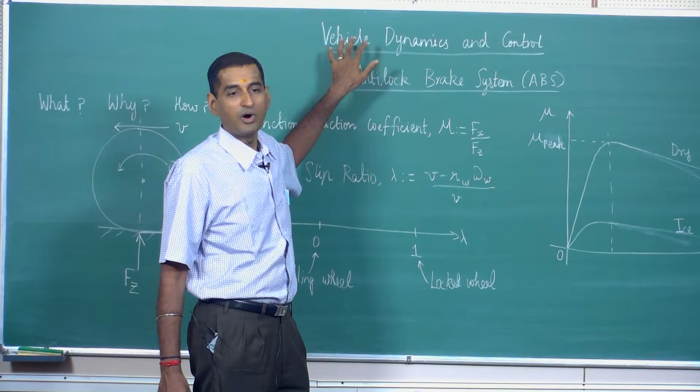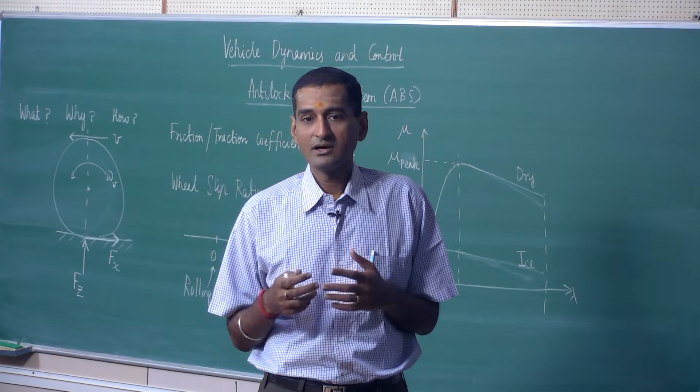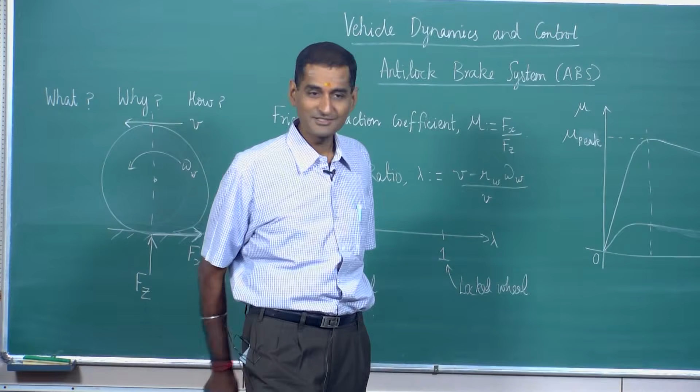As we transition to more complex and advanced automobiles, the domain of vehicle dynamics and control is going to become very important. So to motivate the importance of this domain to automotive design, today I am going to take a simple example of anti-lock brake systems, which all of us are aware of, and map how vehicle dynamics and control is applicable to this application. One could take other applications also and do a similar mapping, so that we get motivated to learn this field of vehicle dynamics and control.

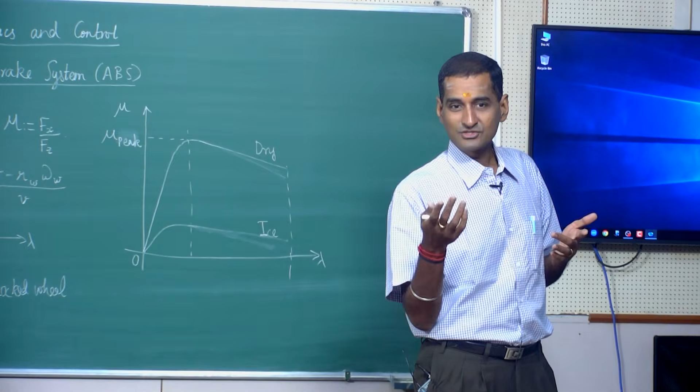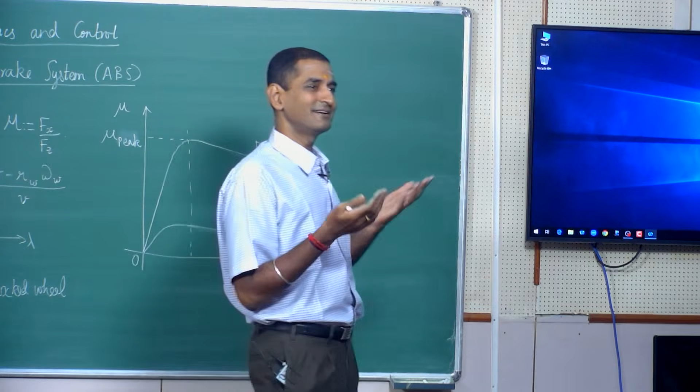I am sure all of us would have heard about ABS. If you travel in a car, it is very likely that the car has an ABS, and you would have seen ABS printed on the rear of the car to demonstrate that it is fitted with an anti-lock brake system. It is very common in automobiles today, mandated by law in certain classes of automobiles, and on the way to becoming mandated in other classes as well.

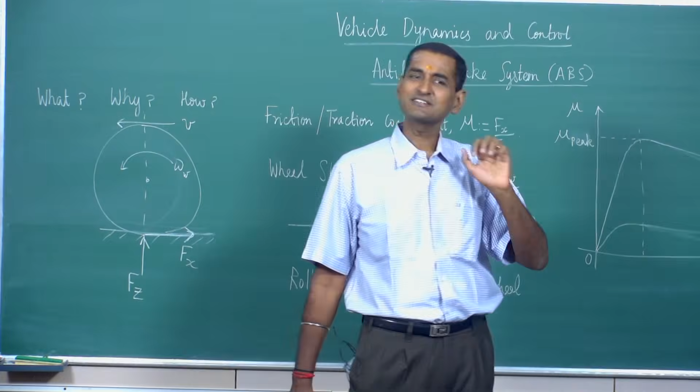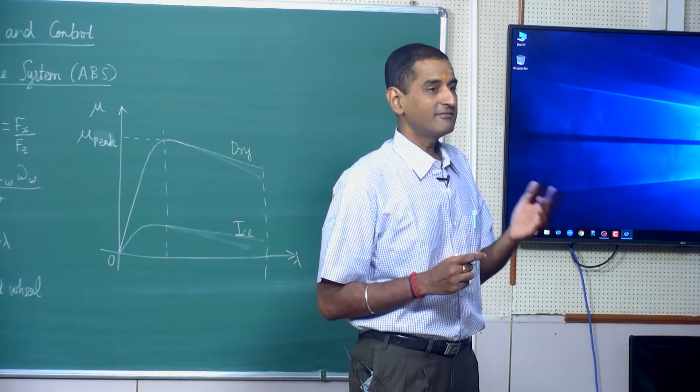If you look at the title, there are three words: anti-lock, brake, system. We understand what a system is, and we also understand what a brake is. For what purpose do we use a brake in a vehicle? Whenever we want to decelerate the vehicle, we apply the brake, and whenever we want to stop it, we continue applying it so that it comes to rest. That is the broad function of a brake system.

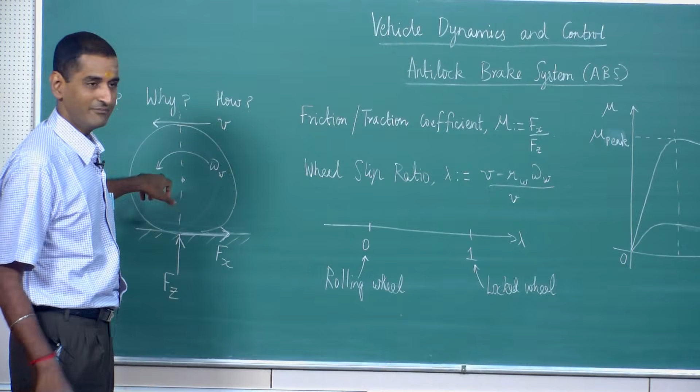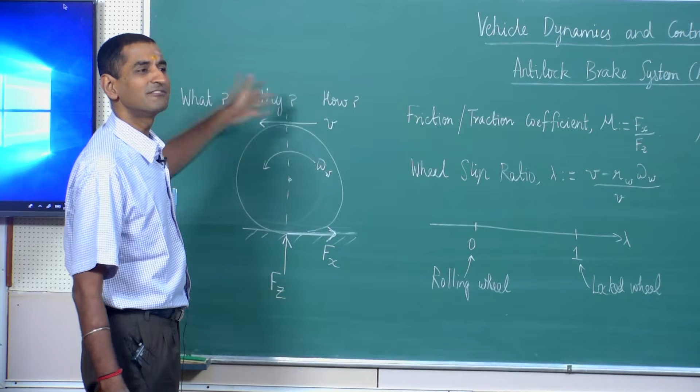Then what does this adjective anti-lock mean? Let us first understand that, then we will figure out how vehicle dynamics and control becomes important. Let us look at only one wheel, even though a typical passenger car has 4 wheels. If I draw a simple diagram, without loss of generality, the wheel is rotating counterclockwise at an angular speed of omega subscript w, and the vehicle is moving in this direction with vehicle speed v.

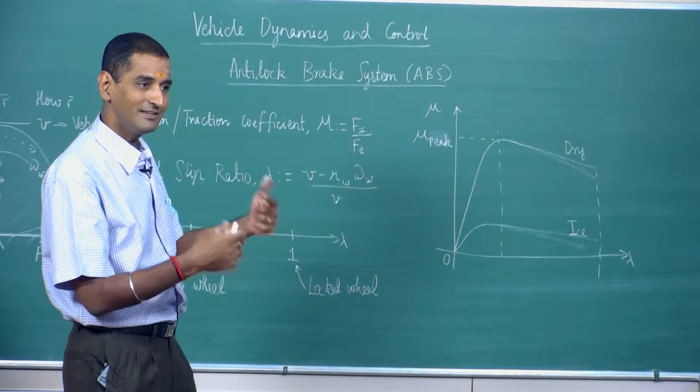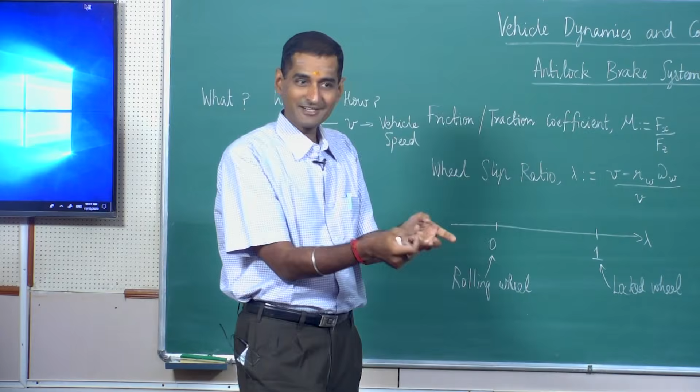If I want to brake, what I do is apply a clockwise torque through a brake system, so that I can start decelerating the wheel, and the deceleration of the wheel results in a deceleration of the vehicle. This is very evident in a bicycle. When you apply the brake, you can see the wheel start decelerating, because brake pads go and contact the wheels and apply a brake force and a brake torque.

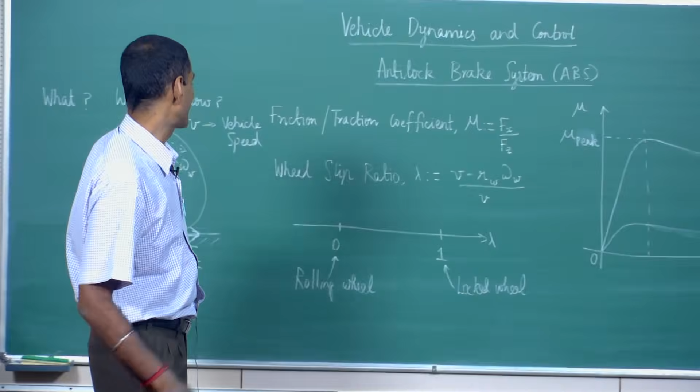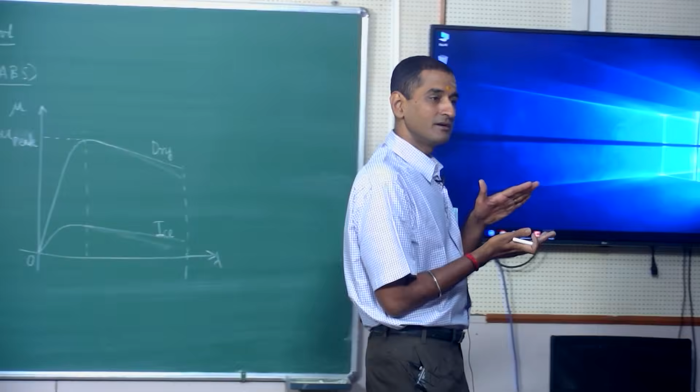If we look at what is called the tire-road interface, all the forces that get transmitted to the vehicle, be it for driving, braking, or steering the vehicle, get transmitted through the interaction between the pneumatic tire and the road interface. That is a very important aspect of it.

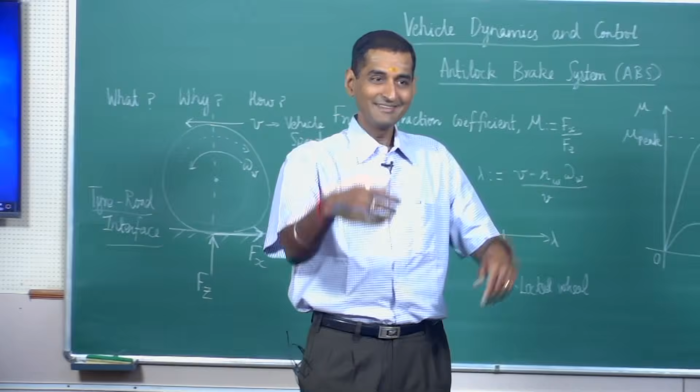If you look at the contact between the tire and the road, there is a normal force Fz which acts at the contact, because when you park a vehicle, the weight of the vehicle acts on the road and the road applies a reaction. That is the normal reaction Fz. There is also a braking force which tries to decelerate the vehicle. So if the vehicle is moving in this direction, I need to apply a decelerating force Fx in this direction.

Now let us say I am having a normal braking process. What happens is that my wheel will rotate, I apply the brake, the wheel will start decelerating, the angular speed will start reducing, and the vehicle speed v will also start reducing, and at some time the vehicle will stop, and the wheel will also stop rotating.

That is normal braking, what you and I desire. But imagine sometimes like we would have seen, right, we travel very fast, let us say on a wet road, let us say it rains, and due to some reason I slam the brake.

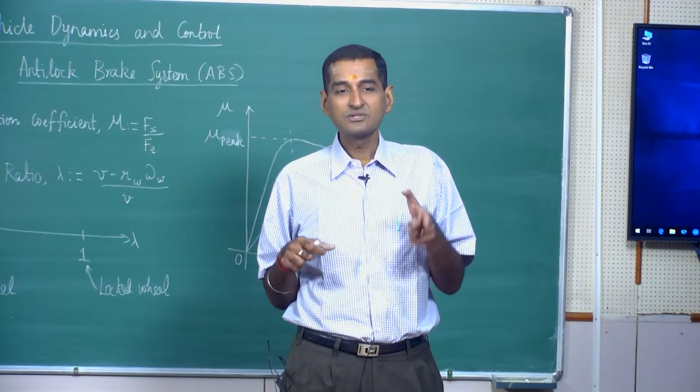What happens? The wheel may stop rotating, but the vehicle is still moving. So what we colloquially call skidding, we say the vehicle is skidding, or the tire or wheel is skidding. That is when a wheel is said to be locked. A wheel is said to be locked if it stops rotating, that is omega w becomes almost 0, but the vehicle speed is still non-zero.

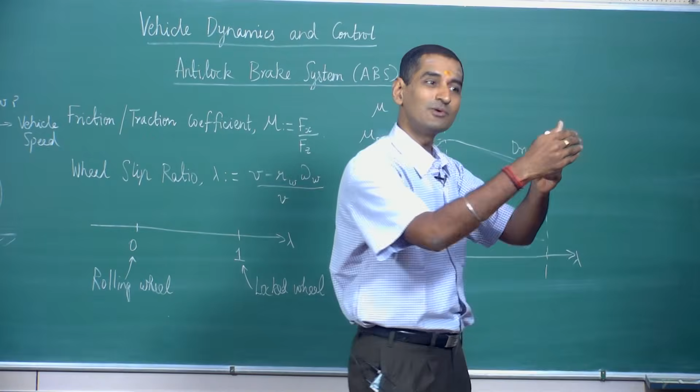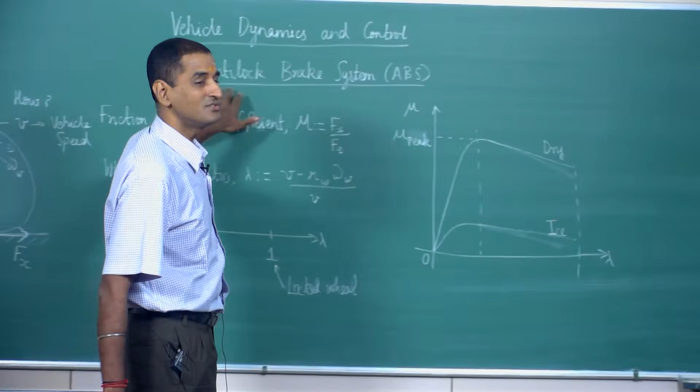Ideally we want the vehicle speed also to become 0 along with omega w becoming 0, but due to some reason, if that does not happen, we are tending to lock, which is undesirable. As the name indicates, now that we've understood what lock is, an anti-lock brake system prevents it. So ABS essentially acts along with the existing brake system to prevent this wheel lock phenomenon. Wheel lock is not desirable.

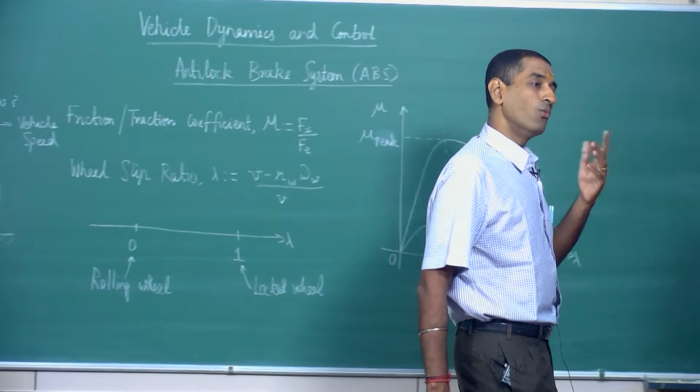Why is it not desirable? What effects come about if we lock the wheel? Of course, one learns deeper when we go into the domain of vehicle dynamics. But let me explain with a very simple analogy why wheel lock is not desirable, using a simple mapping. Let us say I am talking with you and walking on this floor.

Let us say the floor is dry. So what am I doing? I am placing my feet on the floor, applying some load due to my body weight, so there is a normal reaction. Then at the interface between my feet and the ground, I am applying a force which helps me propel myself, similar to what we do in a vehicle. That is how I keep moving.

Now imagine I am talking to you, so I am not focusing on what is on the floor, but there is a patch of water, a puddle, on the floor. So what am I doing? I am generating this force at the interface between my foot and the ground using my bones, muscles and other joints. I am generating a force.

So now let us say I step on the puddle with the same intensity. What do you think will happen? I will slip. Why? My body is still the same, my muscles and joints are still the same, so in a sense my system is still the same, if I look at myself as a system. My system is still generating the same force, but what has now changed?

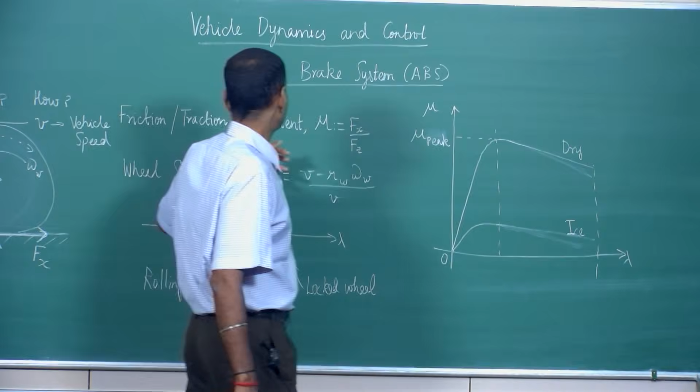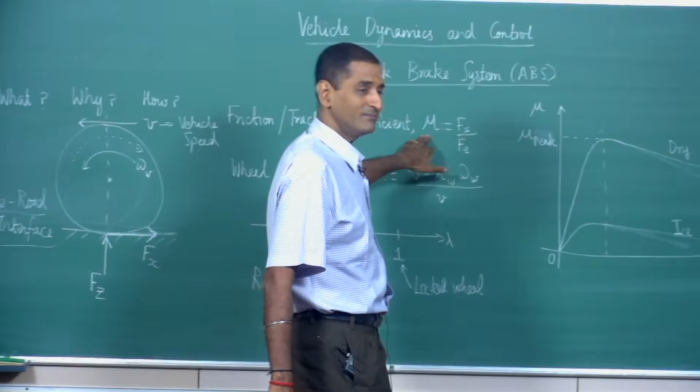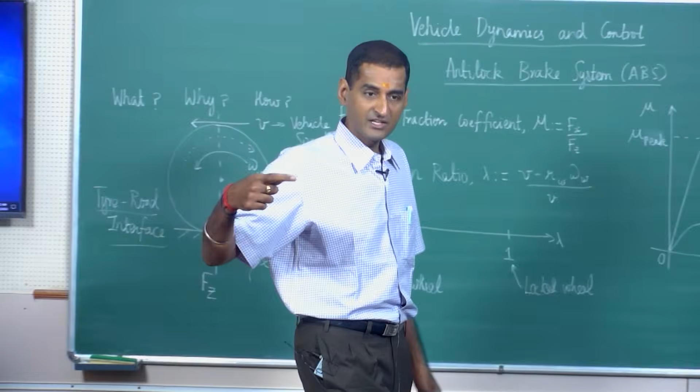So that is where a parameter called friction or traction coefficient becomes important. Some also call this the adhesion coefficient. A commonly used symbol is mu. This is defined as the ratio between Fx, the force acting along the direction of motion or opposite in this case, which is a braking force, called the longitudinal direction. In vehicle dynamics, longitudinal direction means the direction along the motion of the vehicle. So Fx is the longitudinal force, x denotes the longitudinal axis, and Fz is the normal load.

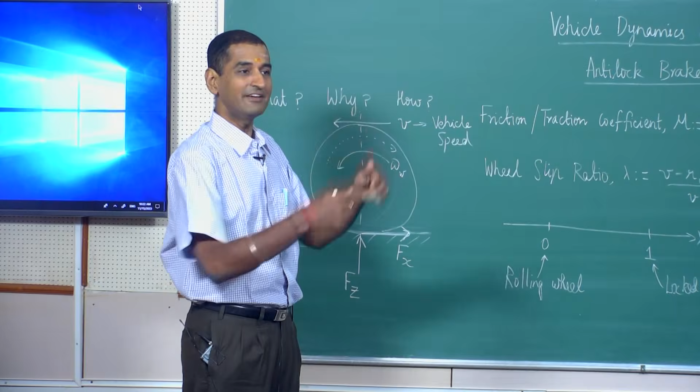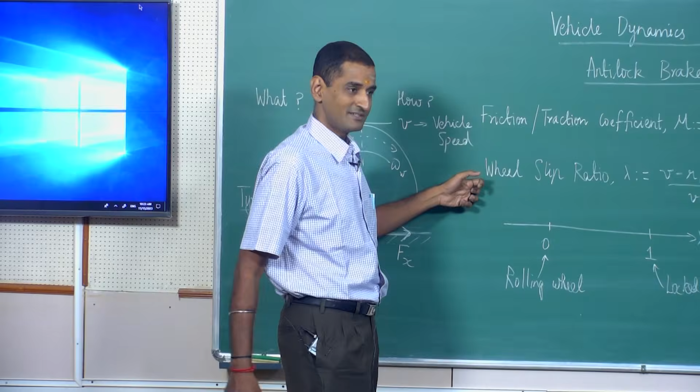So this mu is defined as a ratio of Fx and Fz. Now we want this to be as large as possible, so that I can drive or brake my vehicle very efficiently, but that is not the case in real life. It depends on a lot of things. One of the important parameters this depends on is what is called the wheel slip ratio.

See, even when we walk, if I step on a puddle of water, what do I say colloquially? Oh, I slipped, right. So similarly, a tire also slips. How do we quantify that?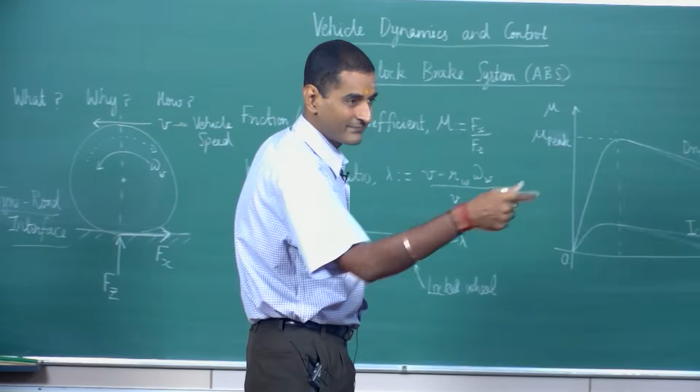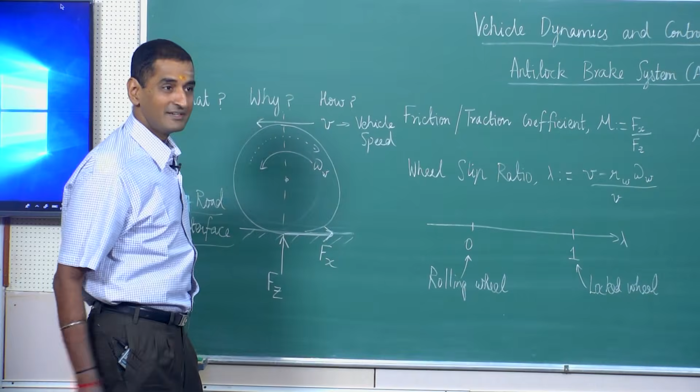The way we quantify it is we take the difference between the vehicle speed V and, if I have a purely rolling wheel, like we studied in middle school physics, a cylinder or disc rolling on a surface where the circumferential speed is R times omega. So R_w times omega_w is the circumferential speed of the wheel. If I stand at any point on the circumference, that is the speed I will perceive. So for a purely rolling wheel, V should equal R times omega of the wheel, but that is not the case in real life. There is a difference between the two.

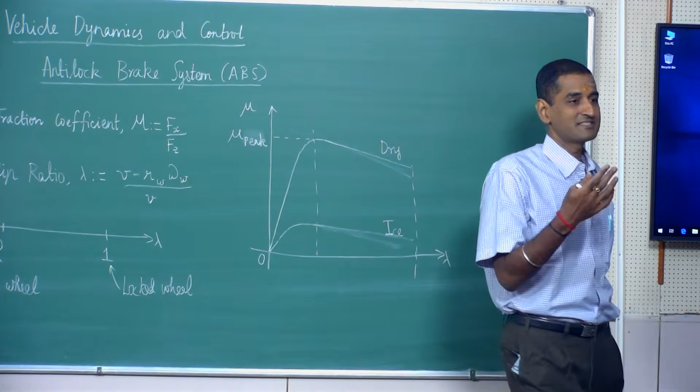That is what we capture in the numerator of this parameter. The denominator is the vehicle speed itself. This is what is called the wheel slip ratio. It quantifies the difference between the vehicle speed and the circumferential wheel speed, relative to the vehicle speed itself. These two parameters become very important for understanding anti-lock brake systems.

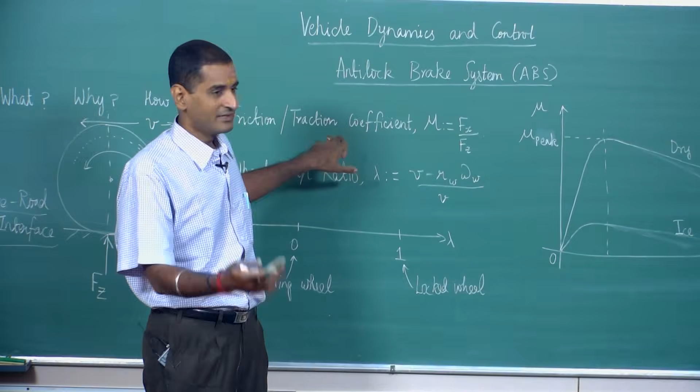If you look at lambda, how it varies, this formula is typically used during braking. Let's say I have a purely rolling wheel, so V equals R omega. What happens to the numerator? It becomes 0. So 0 means a purely rolling wheel.

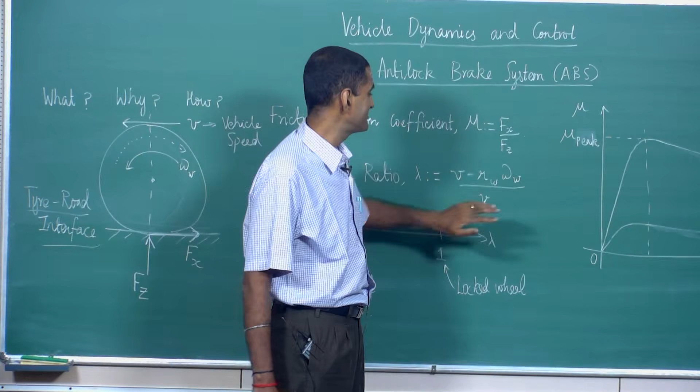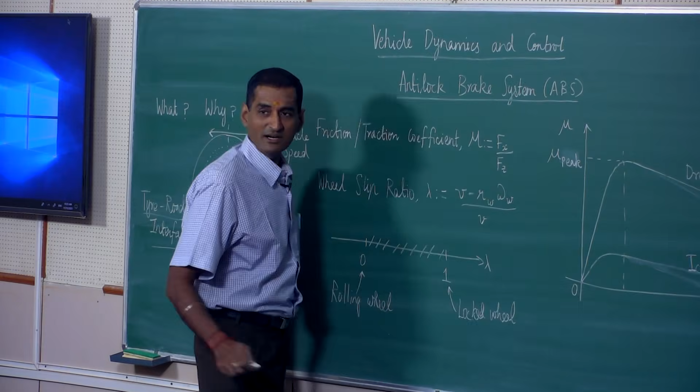Let's say I have a locked wheel, a skidding wheel. Omega has become 0, but V is still non-zero. What will happen to this ratio? It will become 1, because the R omega term goes away, I will have V by V, I get 1. So you can immediately see that the wheel slip ratio varies between 0 and 1 during braking.

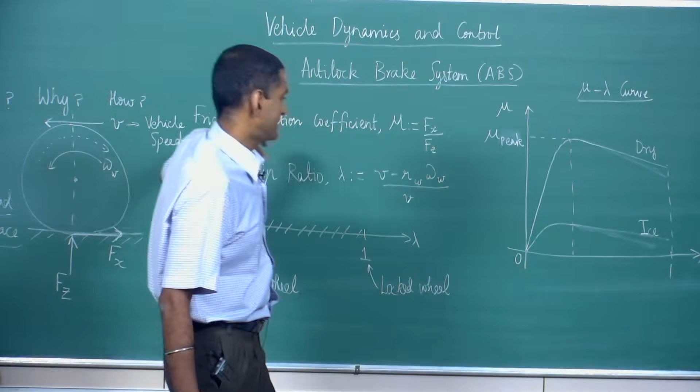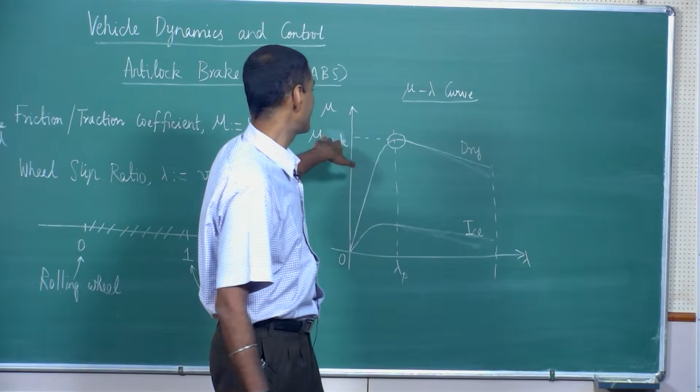Now if we look at a typical pneumatic tire used in road vehicles and examine their characteristics, we draw what is called a mu-lambda curve. Mu, the friction coefficient, is plotted on the ordinate, and lambda, the wheel slip ratio, is plotted on the abscissa, the horizontal axis. If you typically look at it, it starts increasing, peaks around a wheel slip ratio, let's call it lambda_p, with a corresponding mu value, let's say mu_peak, and then after that it starts decreasing.

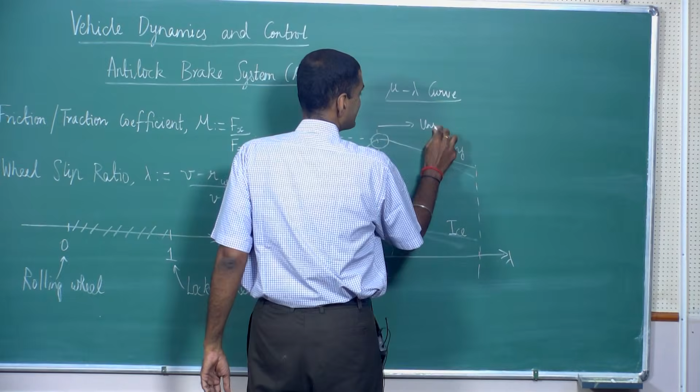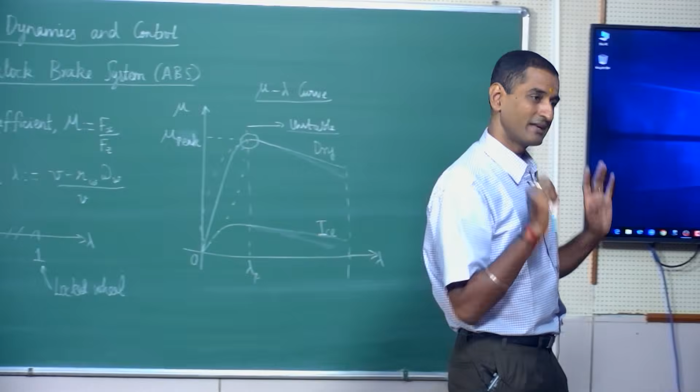This region after the peak is an unstable region. You and I do not want to go here, because the wheel is going to tend towards locking, and when a wheel locks, it results in certain undesirable effects for the vehicle. So we want to operate in the stable region before the peak, that is where we operate most of the time. Let's say you and I drive a vehicle doing mild, gentle braking - by and large we are going to operate in this region.

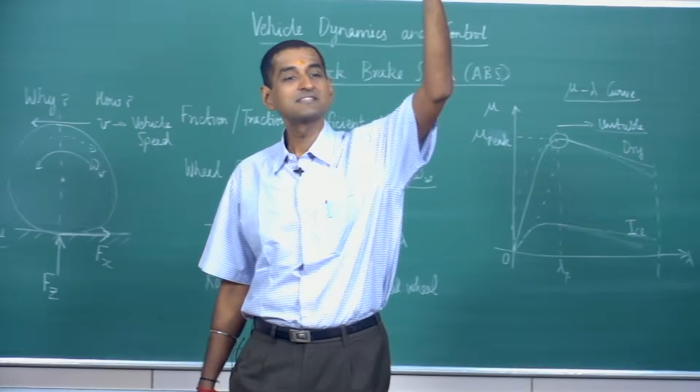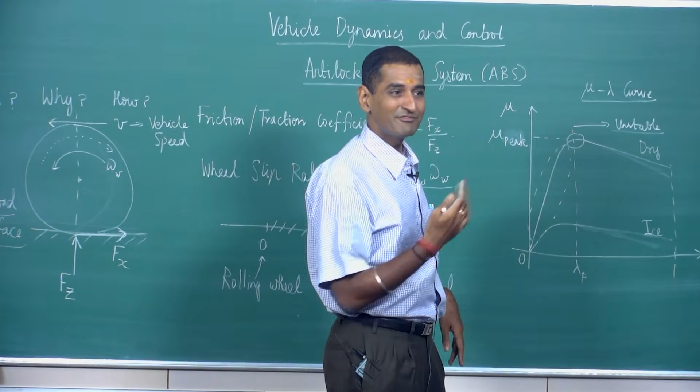But let's say there is an emergency - rain, driving on the highway at high speed, and we see an obstacle or another vehicle parked or coming to a sudden stop. What you and I will do is slam the brake. That may be a one in a million case, but still important for your safety and mine, and that is when there is a risk we go into this unstable region, and that is where ABS should come into action.

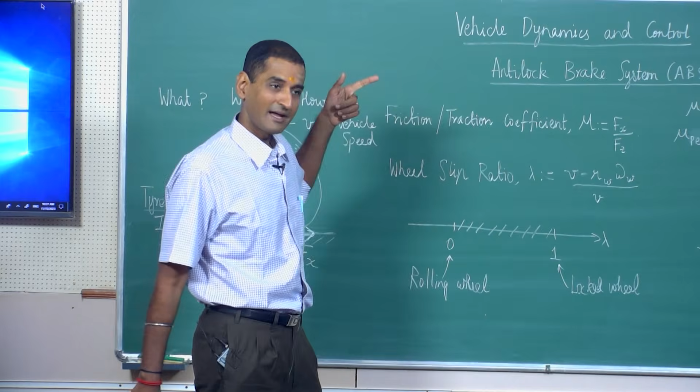So what the ABS does is it does not intervene when we are in the stable region, between 0 and lambda_p, it lets the brake system do its job. Only when we go into a panic braking maneuver, or even a mild braking maneuver, say on an icy surface - imagine a road covered with ice - even if you press the brake a little bit, there is a chance the wheel may lock because the capacity at the tire-road interface is not very high on an icy surface.

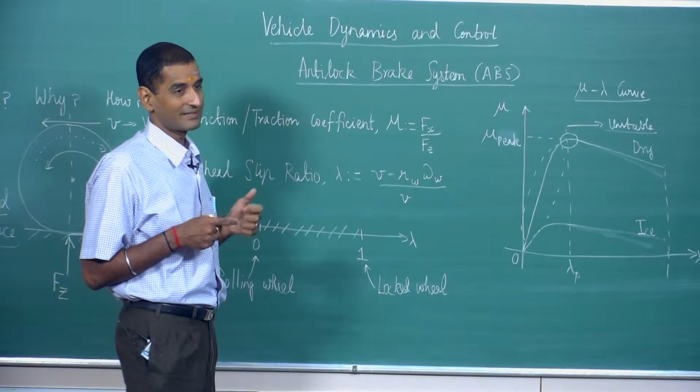ABS will intervene and try to ensure that wheel lock is prevented, and under that scenario we remain as close to the peak value as possible. So that is the concept behind ABS.

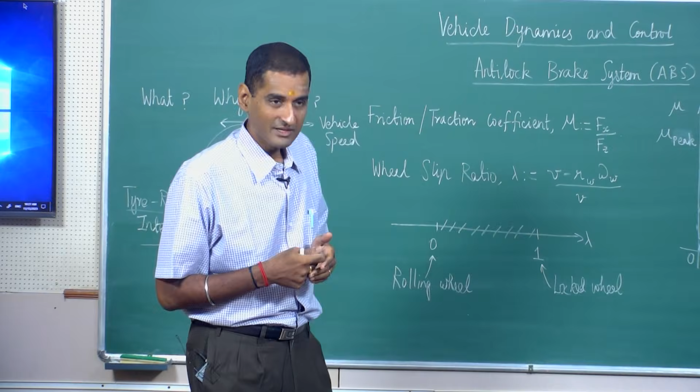So what we have done till now is answered two questions: what is ABS, and why one should use ABS. Now comes the question of how. How does it monitor, how does it keep it near this peak value?

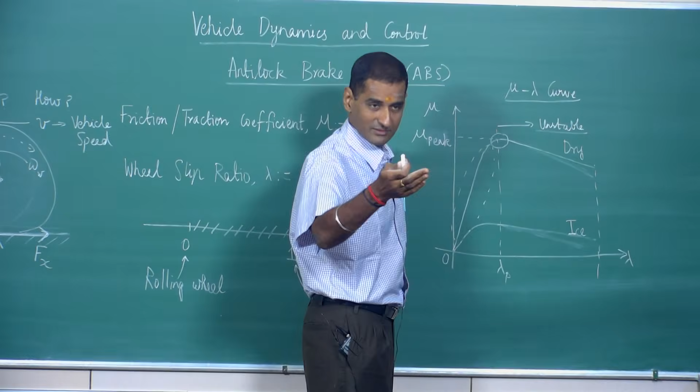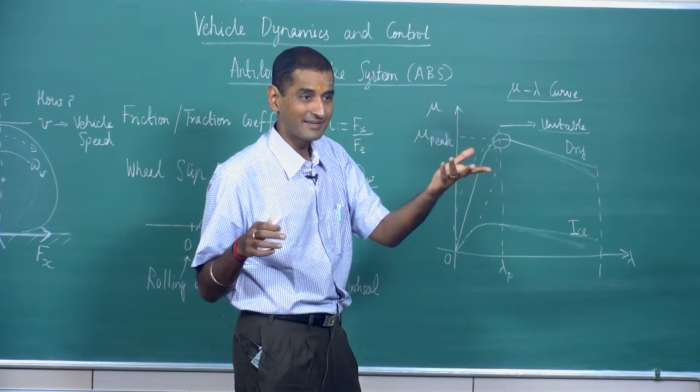In ABS, if there is a scenario where ABS is triggered, as we discussed, ABS does not get triggered all the time. It gets triggered only under emergency conditions where there is a risk of locking, or the wheel has a tendency towards lock. So only when a certain threshold lambda is crossed should it get triggered.

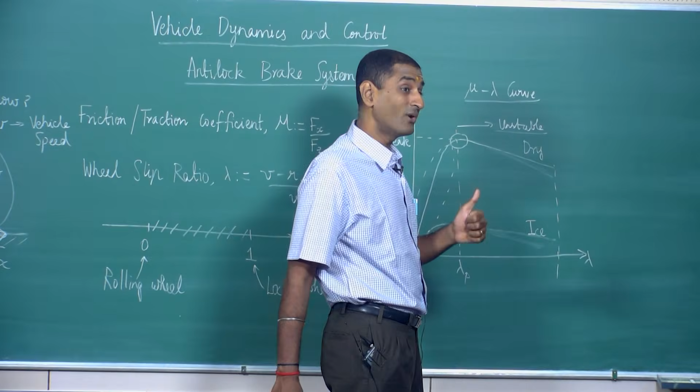Now the question is what is the threshold at which I should trigger the ABS, and what is this lambda around which I should control? So the core concept behind ABS is that I want to regulate or control this wheel slip ratio around lambda p. That is what is called wheel slip regulation.

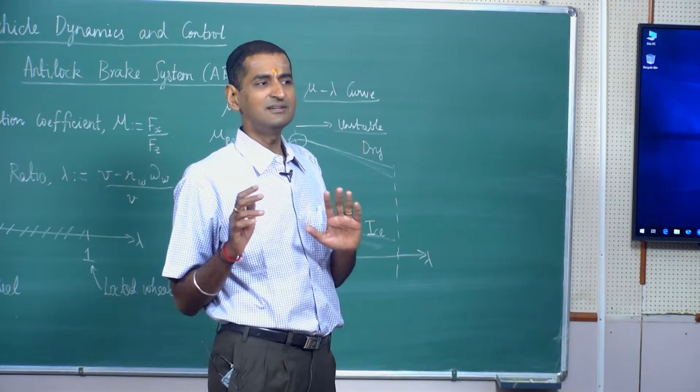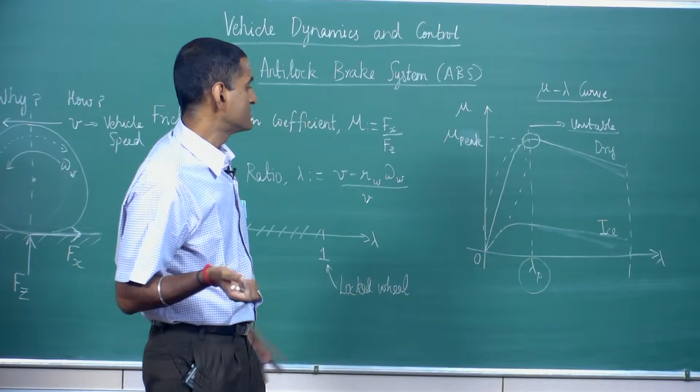Wheel slip regulation is a very fundamental problem in many automotive active safety systems. Wheel slip regulation means I want to control lambda, but there are two questions now. Who gives me the value of lambda around which I need to control?

In the room temperature example, I said I want the temperature to be 24 degrees Celsius. So similarly, what is this lambda? I know it is between 0 and 1 - should it be 0.2, 0.15, or 0.1, 0.05? Who gives me that value? That is question number one.

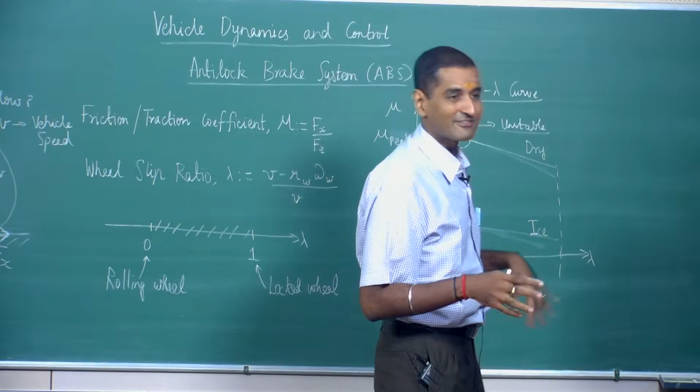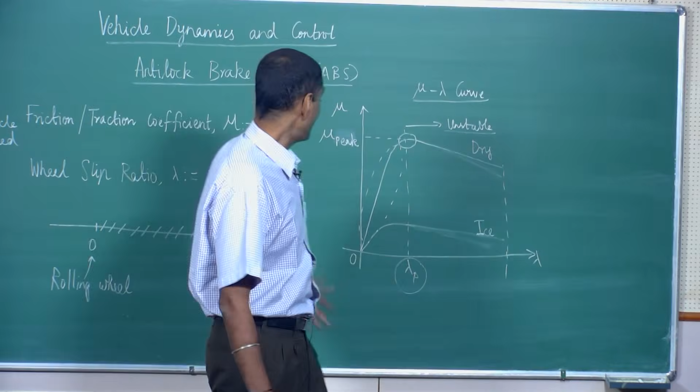Let us say somebody gives me that value, let us say someone says, control lambda around 0.15. Okay, I know this reference, what we call a reference value. But then how do I know what is the value of lambda at each and every instant of time?

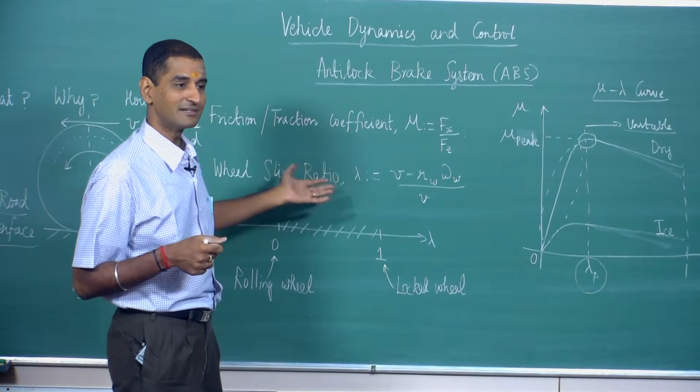In our room air conditioner, room temperature control example, we figured out there is a sensor which measures the temperature in the room and gives it as feedback to control. But in real automobiles, in ABS, someone should give me what is the lambda at this instant of time so that I can control it.

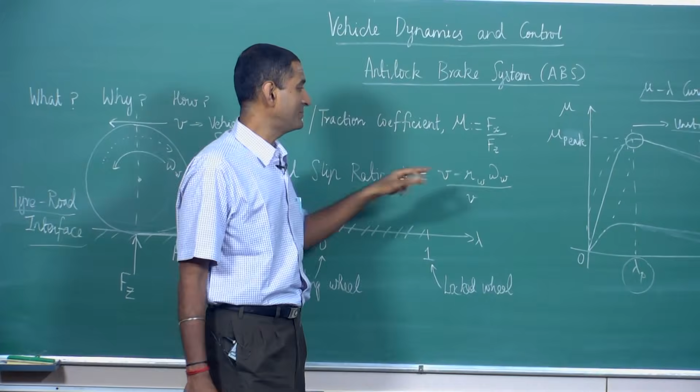How does one get it? Typically, we have what are called wheel speed sensors which monitor the wheel speed, but we do not get vehicle speed to the fidelity that we want for ABS application. So someone has to estimate this lambda and give us that estimate.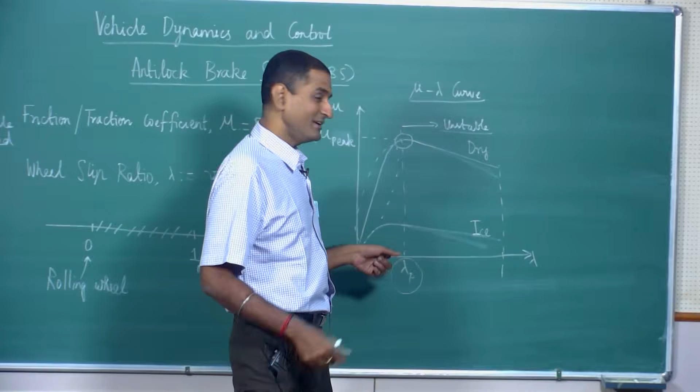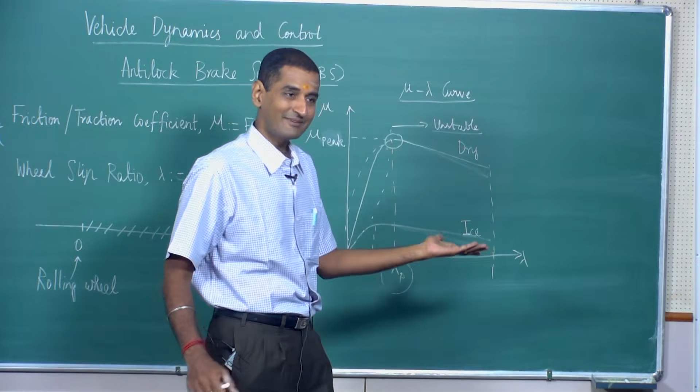We can observe that we keep breaking down this question of how into multiple problems. Two important problems: someone should tell me what this reference value should be, because on a dry surface this may be 0.2, on an icy surface it may be 0.05, since the mu-lambda curve is going to be different for different road surfaces.

You and I can see the road and tell, oh it is a dry surface, wet surface, or a snowy or icy surface. How does the vehicle figure this out automatically when it is running continuously?

Suppose I am driving the vehicle on the road today - initially there is a dry surface and suddenly it rains, there is a transition from dry to a rain surface. You and I can perceive this. How does an automated system installed in a vehicle perceive that change? That is an important question for us to answer.

So someone should tell me the reference value, which changes depending on the condition, and someone should also tell me what is the actual value by giving an estimate of it - then only can I control. And the way we control is by using the brake system.

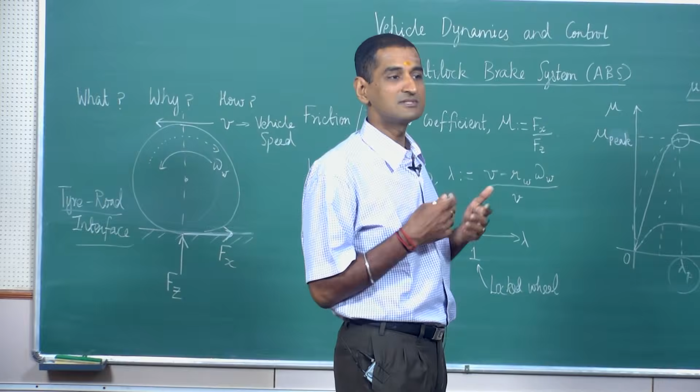So, we have brakes on vehicles. If you take a look at bicycles and typical motorcycles, we have mechanical brakes, which are very visible to us. In cars and light commercial vehicles, we have hydraulic brake systems, where you press a brake pedal and hydraulics apply the brake. In trucks and buses, there is a pneumatic brake system that uses compressed air for braking.

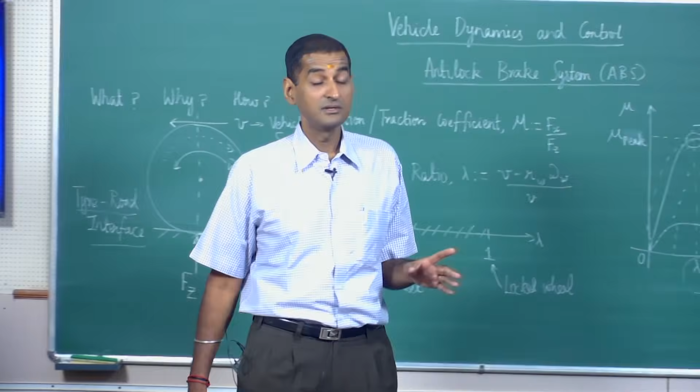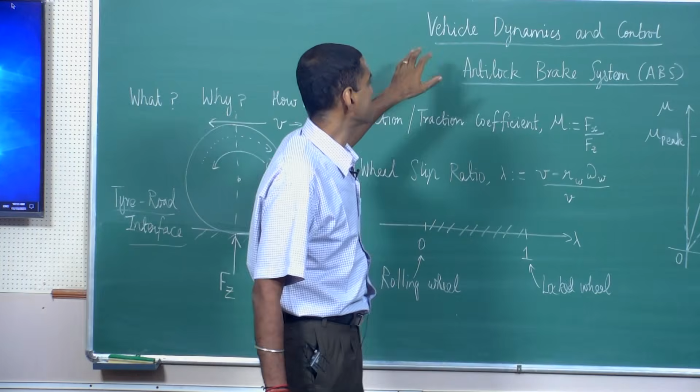Someone should regulate that braking to ensure wheel slip is kept around the same limit. We can observe there are many technical questions one can pose. We have identified a few, and to solve them we need a good understanding of the fundamentals of vehicle dynamics and controls, so that we can figure out how the vehicle will behave when I control using an ABS and what corrective action to take.

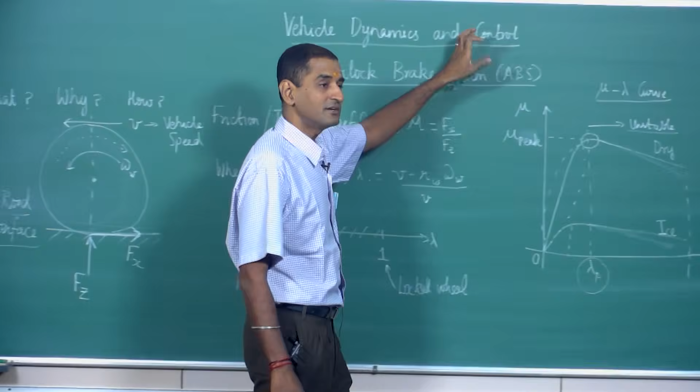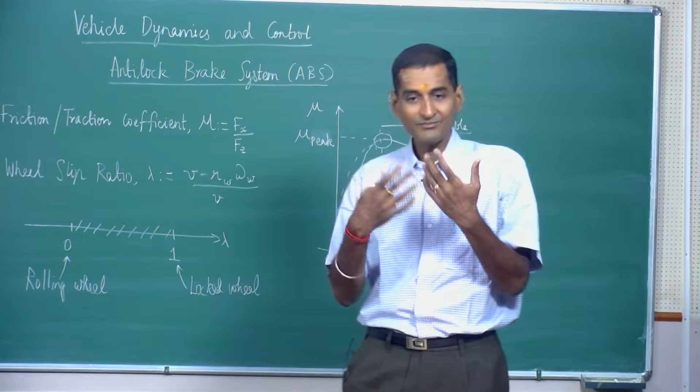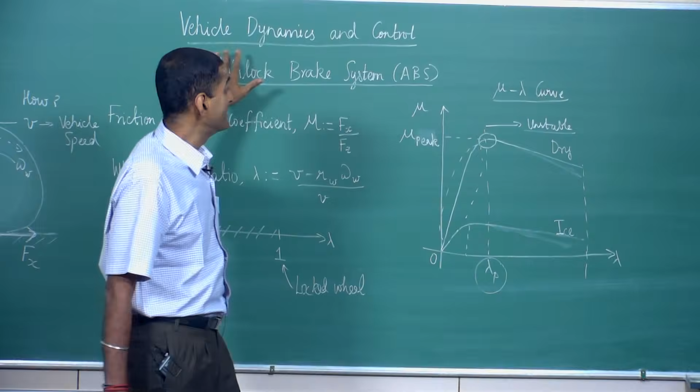Once I determine what corrective action to take to ensure the wheel does not lock, I need ideas from control systems to ensure that corrective action is actually implemented. So we need a good understanding of the science of vehicle dynamics and vehicle control systems, in addition to practical hands-on knowledge of how sensors and actuators work, how to program an electronic control unit, and how to process signals. This is a multi-domain system - quite challenging, quite interesting - but to design it one needs fundamental ideas from this domain.

That is why vehicle dynamics and control is important. We took a simple example to understand it, and today we are transitioning to electric vehicles - ABS is there on electric vehicles also. So the questions become further enhanced in scope. What do I mean by that?

Typically in an electric vehicle, there can be something called regenerative braking. If you buy an electric two-wheeler or electric car today, you'd read that some part of the energy during braking is recuperated and stored in the battery for future use. That is called regenerative braking. In a typical road vehicle, we have what is called friction braking.

During friction braking, we have disc brakes or drum brakes with some friction material, and that produces the braking force. During that process, the kinetic energy of the wheel and vehicle is converted into thermal energy, which is why brakes get hot after a long drive and frequent braking. That is friction braking, but in electric vehicles some component of braking you can get through regenerative braking - so you save energy, recuperate some kinetic energy and store it in the battery.

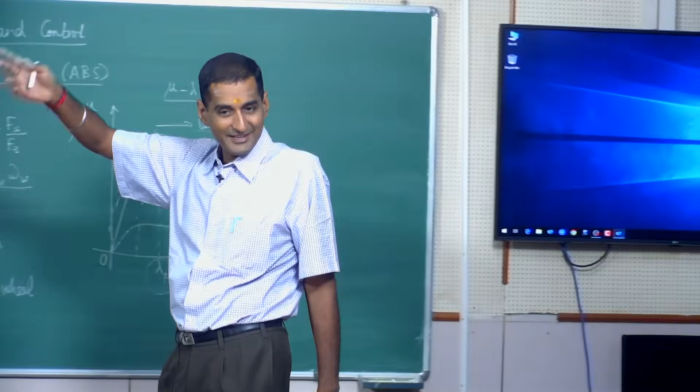Now the question becomes, if I have regenerative braking, how do I implement ABS in that? Because in a conventional vehicle we use pure friction braking to get ABS action, but in an electric vehicle - let's say I have to design an ABS for an electric car tomorrow - I need to ensure I control both my traditional friction braking and also regenerative braking to get a good mix of braking effort.

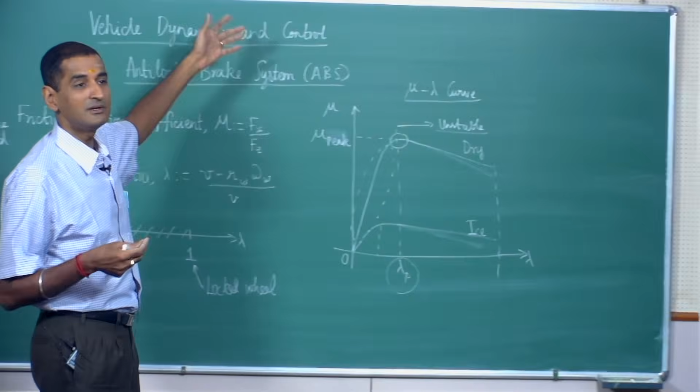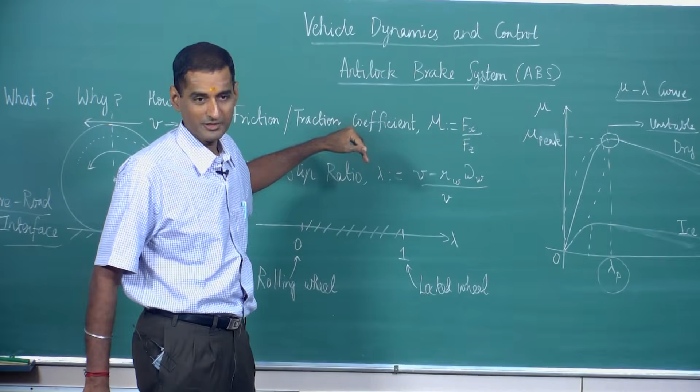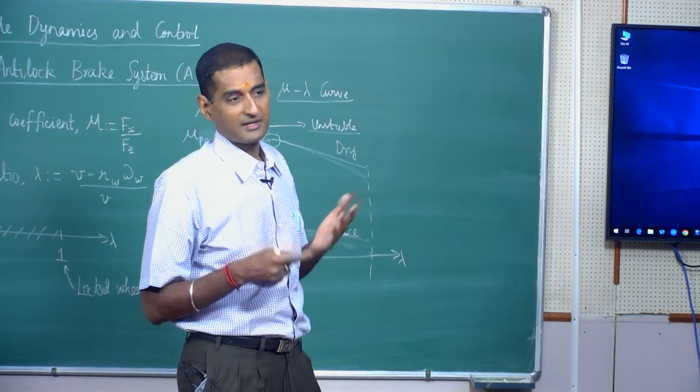So we can see there are additional questions posed as part of the scope of design. Once again we need to know how to control the motor, how to understand the dynamic response of an electric vehicle, in addition to all the questions already posed. One can observe that the domain of vehicle dynamics and control is important to understanding the dynamics of any road vehicle - whether driven by an internal combustion engine, an electric motor, or even a hybrid vehicle.

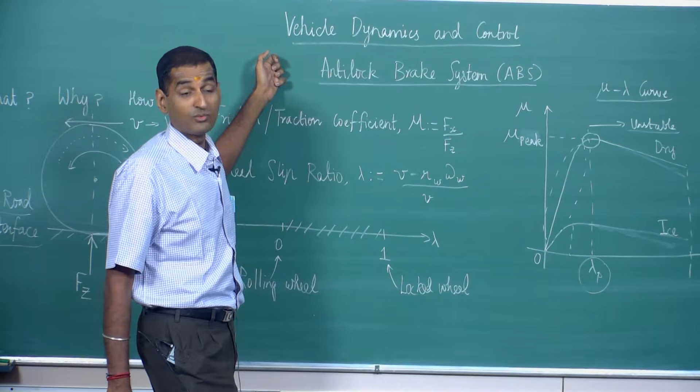So it is important for us to know about it. Of course, this is one of the domains which one needs to understand to become a well-rounded automotive designer.